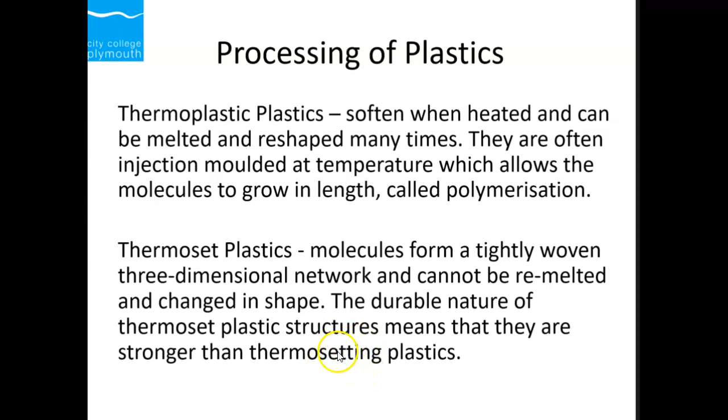Now, again, as I explained earlier, the polymers are made up of long chain molecules, formed during the process of thermoplastic polymers. The chains are aligned in thermoplastics, but these are tangled in a thermosetting plastic.

Now, processing of thermopolymers in this way increases both the strength and the modulus of the material, but it reduces the ductility. We can reverse these effects by doing the annealing. As the heat-treated polymer is processed, the chains are allowed to slip more frequently and more easily. They can glide over each other, hence they are easy to mold and remold.

If the processing temperature is too high, the annealing will occur differently. If we increase the processing temperature too high, that will damage the chain. The reason is because you are breaking the bond and forcing the material to become ductile.

Because of this, the material properties become directional. The polymer properties can become directional - they might be stronger on one side but weaker on the other. These directional properties are known as anisotropy.

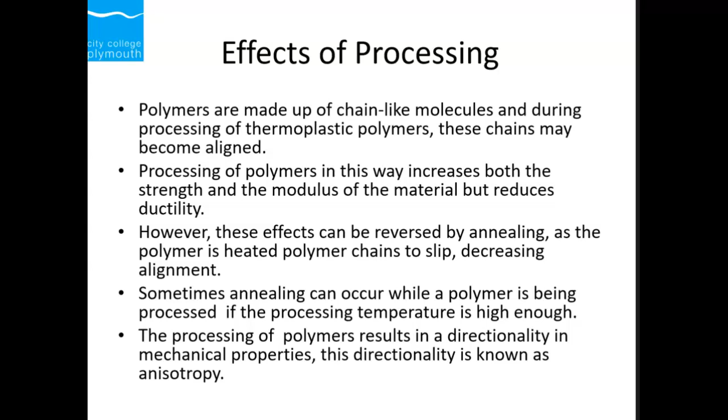Now, when we process the polymer, different processing techniques - extrusion, and what are the characteristics? In extrusion, the process is usually continuous. They form a uniform solid or hollow or a complex cross-sectional area. Extrusion has a high production rate, requires low tooling cost, and has good tolerance.

Then we have injection molding. Injection molding is used when we need good dimensional accuracy and complex shapes. We can create a thin wall with very high production rates. The dies are expensive.

Then we have structural foam molding. Large parts with high stiffness to weight ratios are molded by that process. Less expensive tooling is required as compared to injection molding, but the production rate is slow.

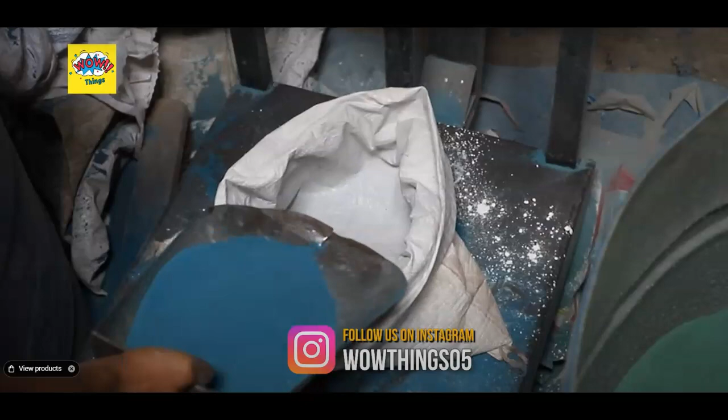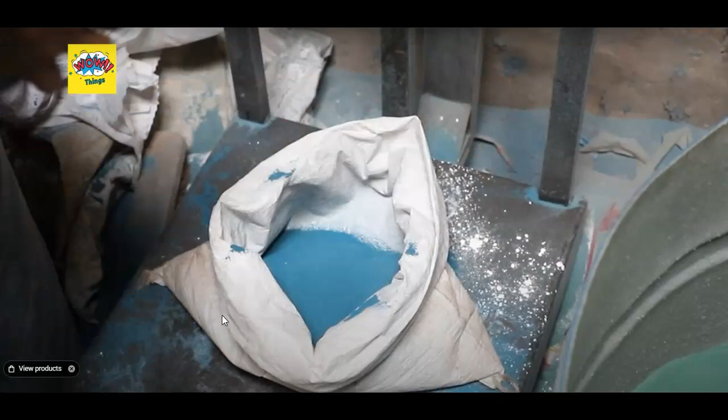So here they are adding color in the polymer process. Catalyst - sometimes they add calcium carbonate, CaCO3.

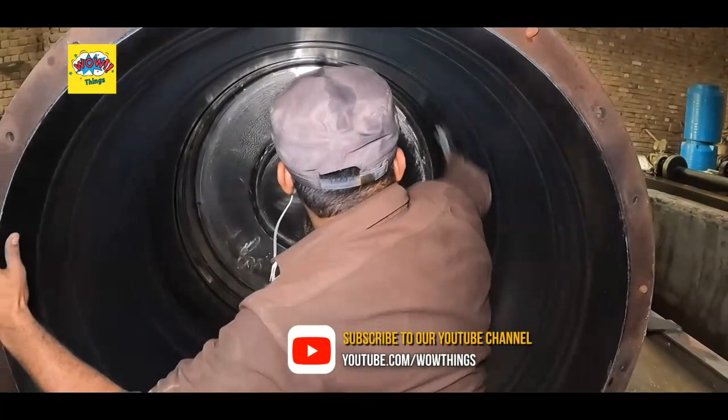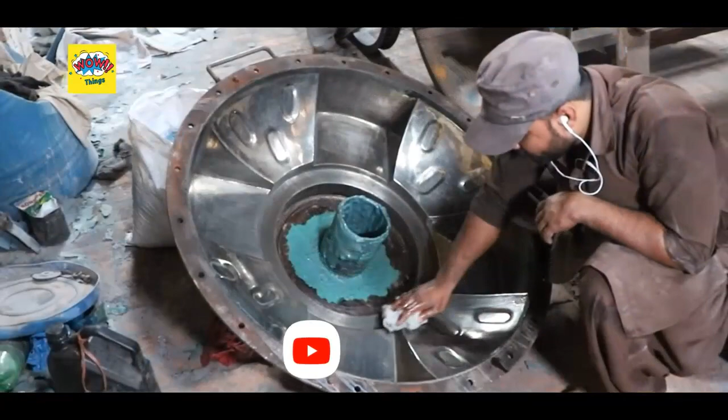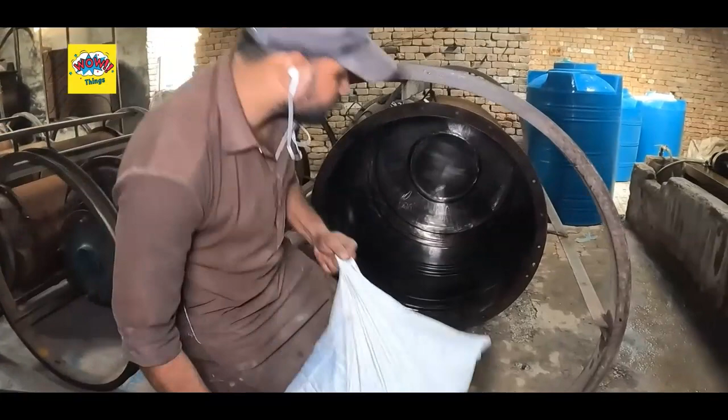So it's cleaning it, just putting a little bit of oil on it.

Then we have a thermoforming process. It's for shallow or relatively deep cavities that we perform the thermoforming process. It does not have any high tooling cost, and production rate is medium.

Now we have casting. Simple shapes can be formed, and sometimes intricate shapes are able to be made. Casting is a laborious process, hence low production rates.

Now we have composite materials. Composite materials have an issue in that it's an expensive process, and the tooling cost actually depends on the process. The high cost is the labor cost in composites. Now let's go to the next one.

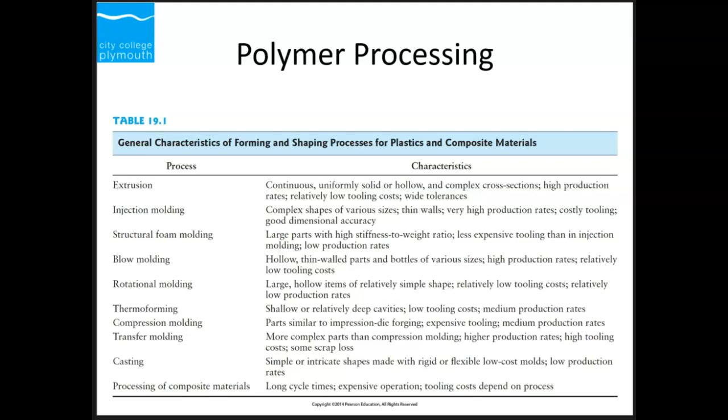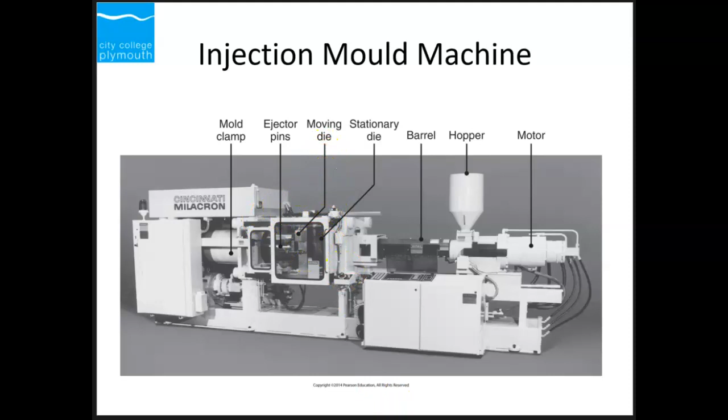Okay, this is the injection molding machine. So you've got a mold clamp, ejector pins, the moving die which moves forward and backward, then there's a stationary die, and there's a hopper. In the hopper, you put the material in, and the motor turns the blades which are inside. As the material moves from the hopper all the way to the stationary die, it gets heated and mixed properly. When it's there, the moving die and the mold clamps come together, the stationary and moving die come together, and the molten material goes into the die. Then the die absorbs all the heat, you release the moving die, it separates, and you can take out the mold from inside.

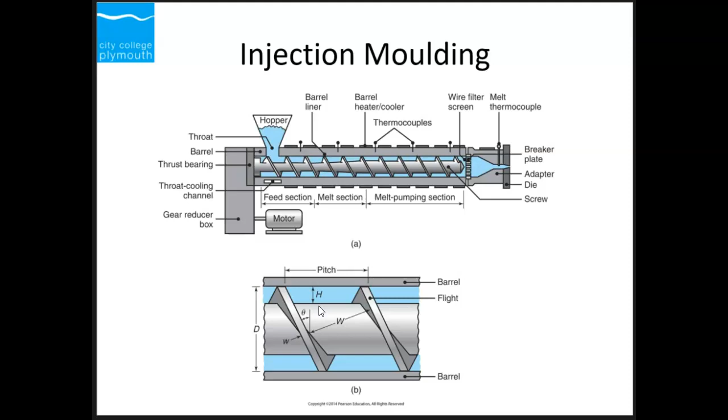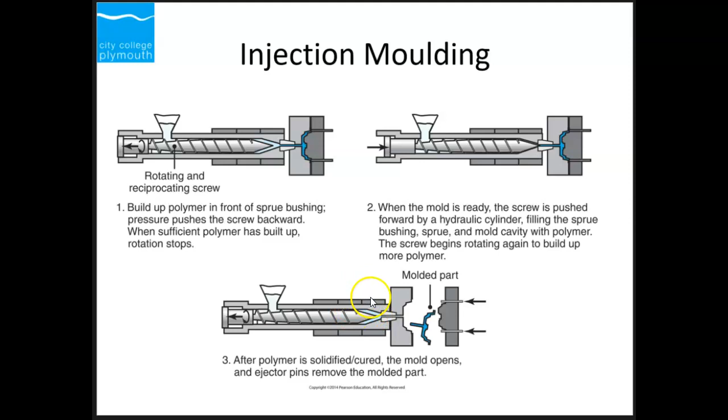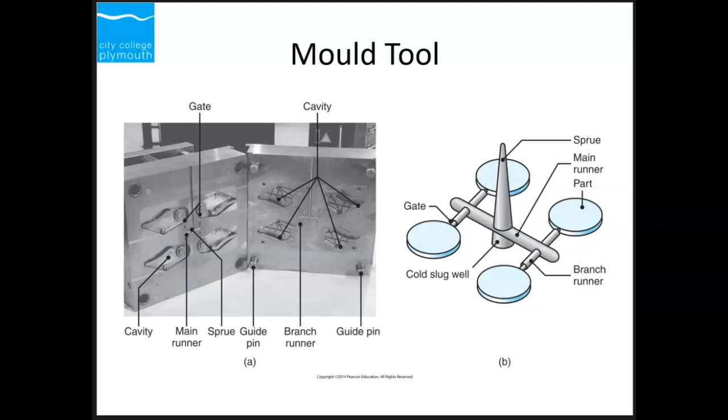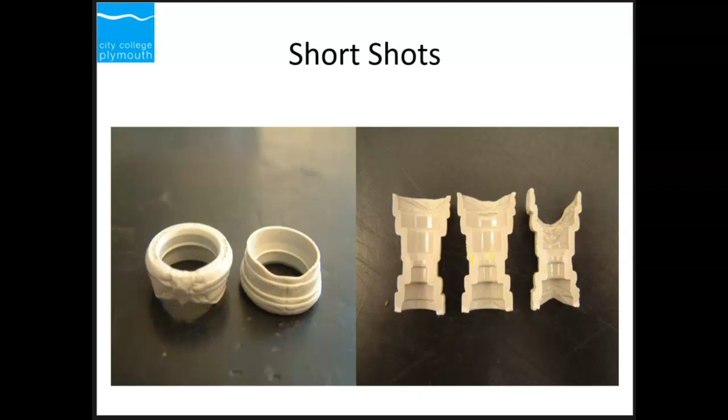Okay, now next one. Sometimes the material does not go all the way in, we call it short shot. The material does not went all the way in. Sometimes we get excess material, this is known as flashing. Flashing can be removed, but again it takes extra labor, and loss of material, so it's not a good idea. So on the top, you can see the flashing here and there.

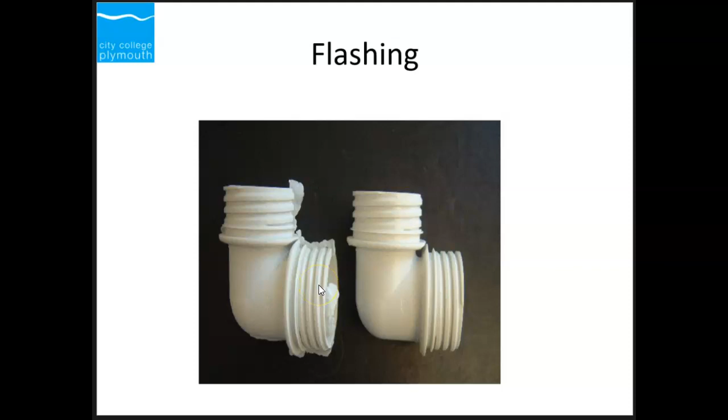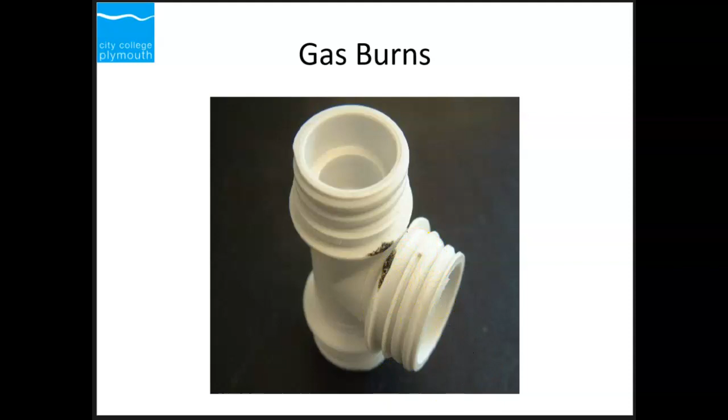Then sometimes we get gas burns, which happens if the temperature increases a lot. Sometimes we get distortion, so you can have a look at the same specimen, same product, but they are distorted, when one side is cooling faster compared to the other side, due to the die material and everything.

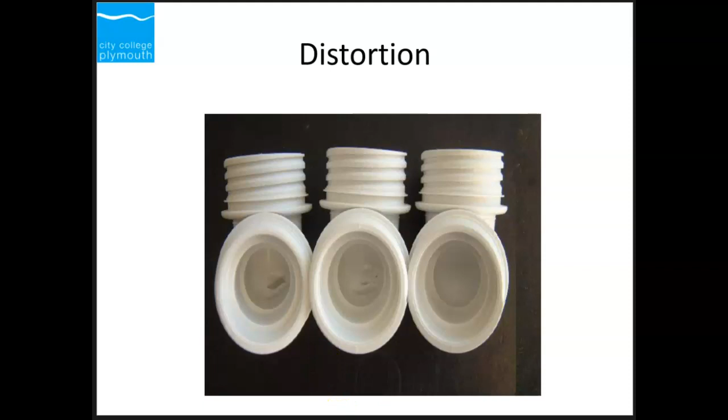Now, if you increase the heating process, that can increase the degree of polymerization. The way the polymer moves and mixes with the screw results in a polymerization chain being formed. We can add some filler material to provide extra strength, for example glass or carbon fibers, to change the mechanical properties and get better mechanical properties.